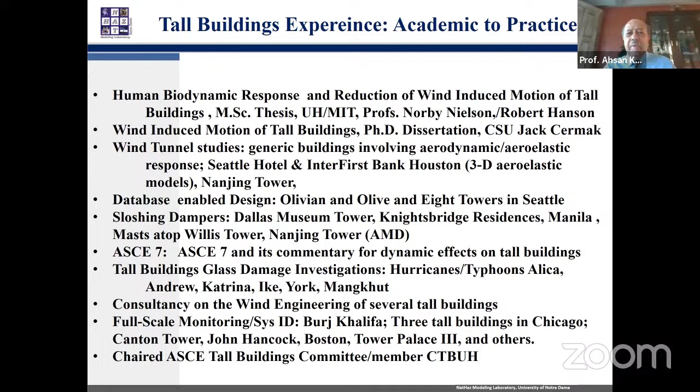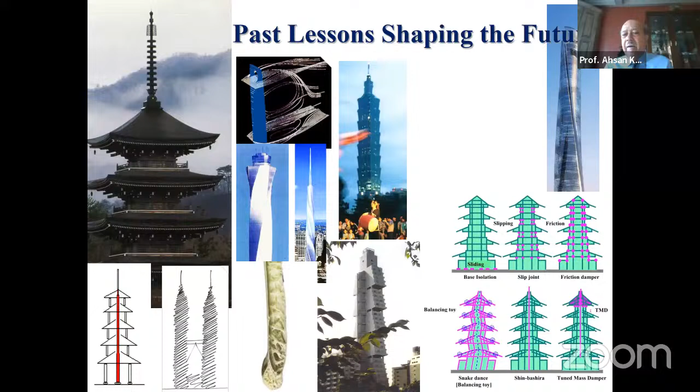Cesar Pelli picked up the same concept and shape for Petronas Towers. Then Taipei 101 used a very similar approach. The University of Tokyo used to have a building shaped like a pagoda, which was my favorite, with a liquid damper on top, but they dismantled it for a different high-rise. If you look carefully at biomimicry, some birds' wings also have reinforcements, which provide a lesson similar to what we see in pagoda designs.

But look at the Burj Khalifa, the world's tallest building—it does not have any damper. Why? Because they nip the evil in the bud, as the old British saying goes. They shaped the building so you didn't have to worry about it. As you go from top to bottom, the shedding behind, the whirlpools or vortices, have different patterns, which means they cannot be synchronized. If you have a square building all the way to the top, they're very synchronized, and you're in trouble—like that building in New York City with a humongous two-floor damper to keep it in place. Otherwise it would just be flying in the air.

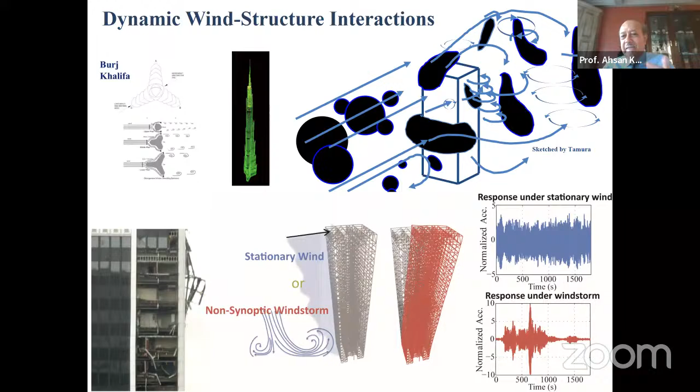This brings back that Delhi conference. I think my paper was the second paper in the opening plenary session, and I started giving the lesson that non-stationarity is important, and everybody sort of smiled at it—oh, so Kareem is doing his stuff. Now if you go to any wind conference, 70% of the papers deal with non-stationarity. So this is an area we need to look at carefully.

Human biodynamic response to motion—if you're sitting on the top floors of a building, things will vibrate. But this all started even with early riders of chariots, who used to feel vibration problems. Those guys were tough though; they just sort of ignored it.

In the early 70s, the Wall Street Journal had an article that changed my interest and brought me into the world of tall buildings. They called it 'dizzy heights,' because a building in New York was moving too much—it was poorly designed, really dancing, and people were getting sick. That got a lot of notoriety, and eventually, about 10 years later, they put dampers in it. But basically that was a structural issue.

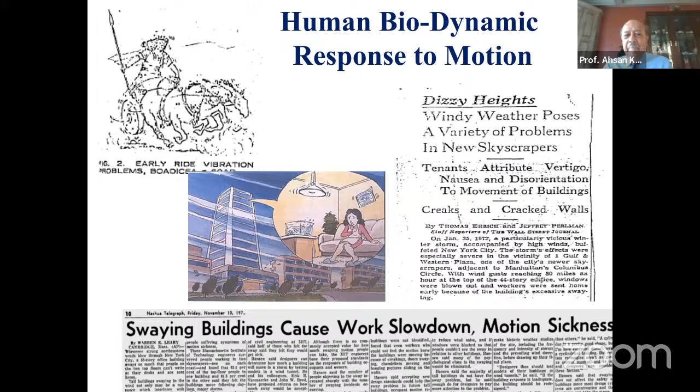So I did my master's thesis—instead of working on confinement of concrete and columns, I shifted. I said, this biodynamic motion, the response to motion by human beings, is another very interesting area. So I did my master's thesis looking at various psychological, physiological, and physical features, because every human being is different—some people may like the motion of a building, others may not.

So I started looking at this coming from a dynamics background—those of you with a systems background will talk about a transfer function. If you're from a structural dynamics background, you'll call it a mechanical admittance function or something like that—what transfers load into response.

So I thought, why can't we have a similar transfer function for a stimulus, which could be acceleration, and how we perceive, which would be reaction. I came up with this: stimulus is proportional to amplitude times frequency raised to the power p, where normally p is 2, which gives us acceleration. This is why people always look for acceleration for motion perception.

So ASCE then had this wind-induced motion booklet. Those of you who are interested, there's a lot of background on how we perceive motion.

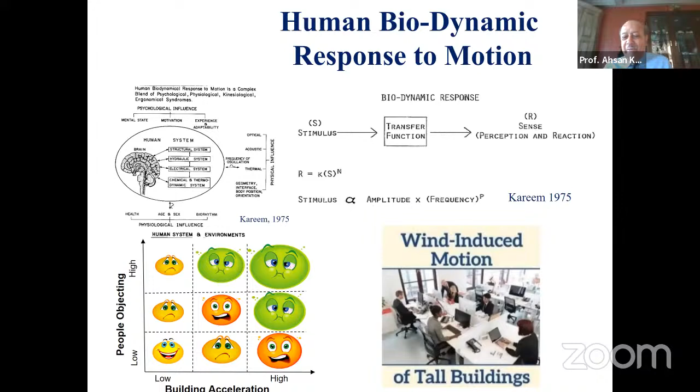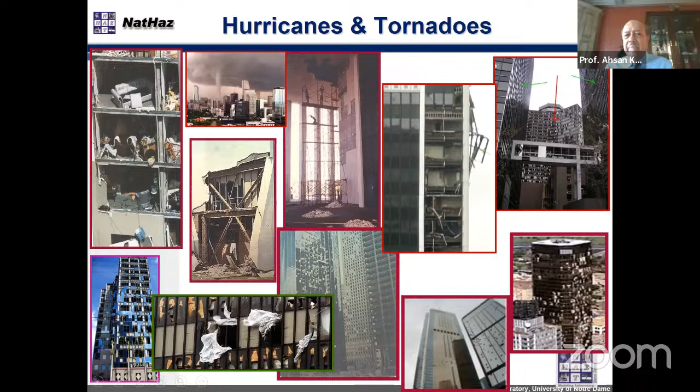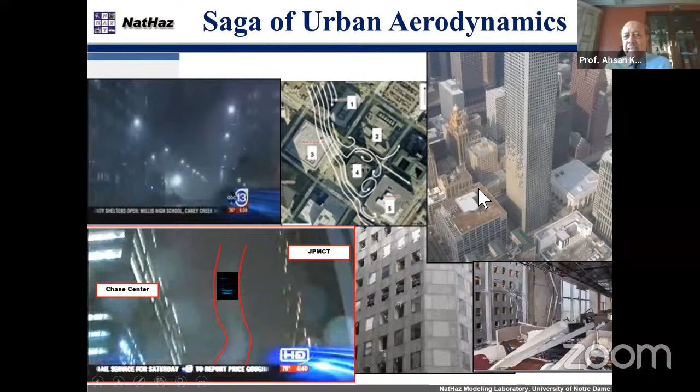So I call it the saga of urban aerodynamics, because we ignore this. This was never considered in any design practice, but we can trace it back to what really happened. Now China is experiencing those things.

This is Typhoon Mangkhut, and as you can see, the window panes are flying everywhere. The building on the right is a super tall building in Shenzhen, and I think that is moving up and down as well.

So I think this is a lesson for India to keep in mind, because I'm sure you have a lot of debris like any other place, and debris gets lifted up. It's not only the wind pressure which causes the damage, it's the impact of the debris which also becomes a problem.

So the cost of wind disasters is escalating - 665 billion in 2022. That's a lot of money to waste. We could feed a lot of people for that. So hazards cannot be eliminated, but we can engineer things to enhance their performance in these particular storms.

I'm pretty sure you guys have cyclones. The Pacific Rim people have typhoons, and we have hurricanes. This year they're considering it might be very strong. But again, climate has some impact on these things, but those are cycles which keep coming and going back.

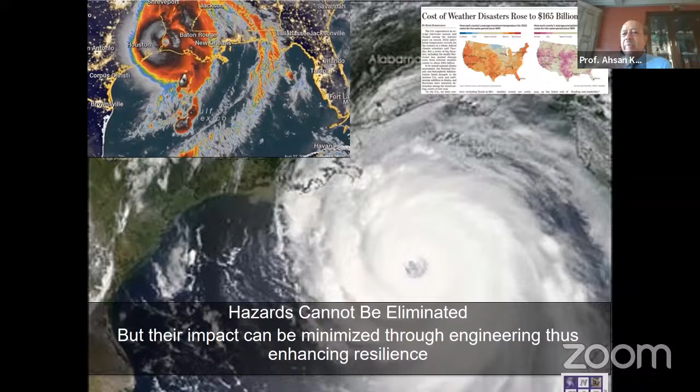What do we do? Model the wind, and we come back to tailor your structure. We have four tools available to us: codes and practice, wind tunnel testing, full-scale monitoring, and the fastest emerging one, computational methods, which is becoming very popular. I'm sure a lot of people listening today are quite involved, because there are many papers I see from India talking about computational methods.

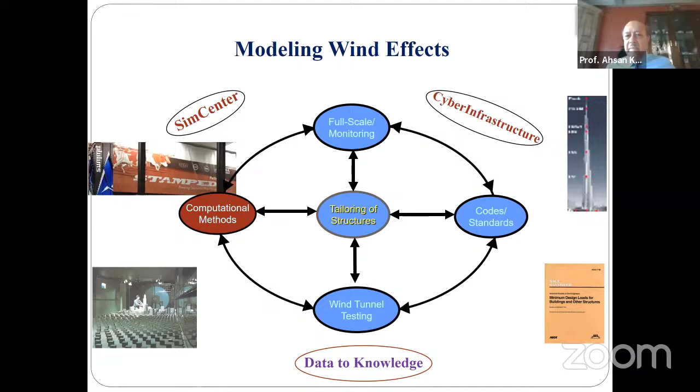Just to give you a history of tall buildings: in the early 60s, they were thinking of making the 2 World Trade Center towers in New York City, which unfortunately are not there anymore. These are some of the people involved with that, and I'll focus on 3 people you probably might have heard of. Professor Davenport was mentioned when he was just starting his career.

This is my advisor, Jack Cermak, in his wind tunnel, because he was the father of developing these boundary layers in the wind tunnel for scaling those things. And there they are. The third person, a structural designer, was Les Robertson, who's sitting here. This is the designer, and these two guys are helping him because he needed help — we had never built a structure like that.

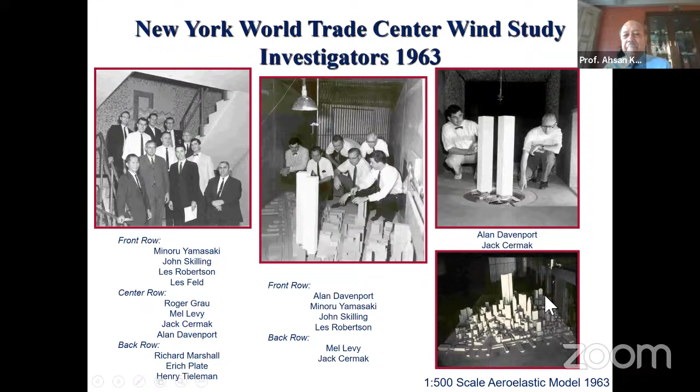Some of the architects included Yamasaki, and this is the New York City model from then. If I had a picture of today, well, these buildings are not there, but everything is about this height now - the new development. That raises a few questions addressed in the code.

Originally, when they started, this wind tunnel was in London, outside London - I think it's the National Physical Lab. That wind tunnel was an aeronautical wind tunnel where you cannot develop a boundary layer, so they used to have a uniform velocity profile.

So they tested these World Trade Center towers, and they were getting 40 feet of deflection at the top. Something was wrong there. They added some turbulence that lowered it down a little bit. They made this profile, which we use in the building codes, and put turbulence on it. Everything went down further. But now we have another challenge.

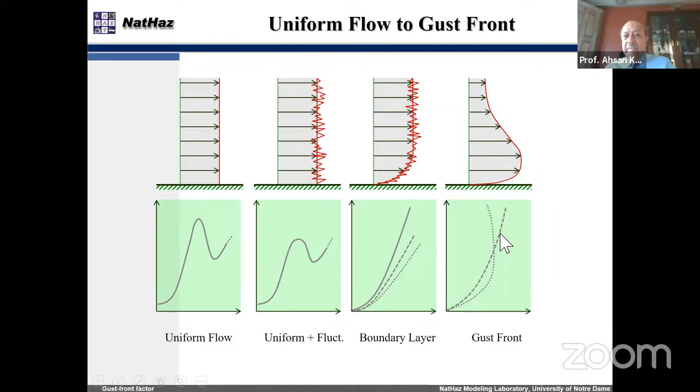We have this boundary layer in the case of a thunderstorm, which is heavy at the bottom, whereas the other one is not. So the response changes accordingly. This is a proprietary picture - please do not use it anywhere.

This is from the World Trade Center towers. This is what they did in England, and the response was way up. So the scale sort of changed.

Just to give you an idea, we come to the middle picture - that's a moderately rough boundary layer - and the right one is a rough boundary layer, and the response of the building became a more reasonable value.

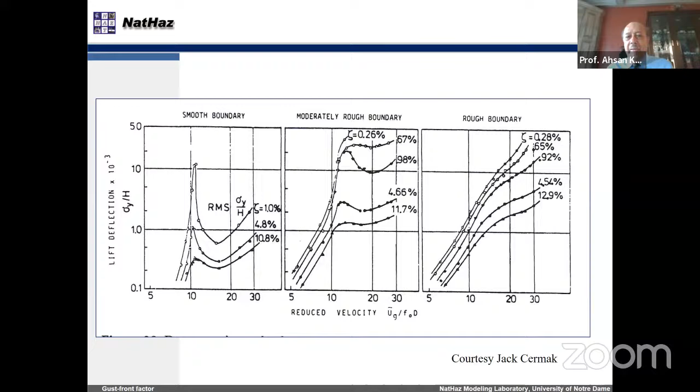So now we are flooded with wind tunnels - all sorts of wind tunnels. I was part of a visit to SERC in Chennai, where the wind tunnel was just starting to develop, and we participated in developing the profiles and the high frequency force balance. Lakshman and Selvi were the two persons there; we interacted with them, both at different ends of their careers at that time.

And China has some huge wind tunnels. The US has built some very sophisticated wind tunnels recently. Another fashionable thing now is these multiple fan wind tunnels. I assume there's one in India too, probably somewhere like Roorkee, I'm not exactly sure, but India has one multiple fan wind tunnel.

Now the question is also what we do with all these wind tunnels when computational methods and supercomputers are really crawling in, trying to compete with the wind tunnels. So just to give you an idea, what do we actually do in the wind tunnel?

Because a designer doesn't care what you do in the wind tunnel - he or she would like to have the loads acting on the building. A structural dynamicist would like to have more generalized loads on a building, mostly in the first mode. So how do we measure them?

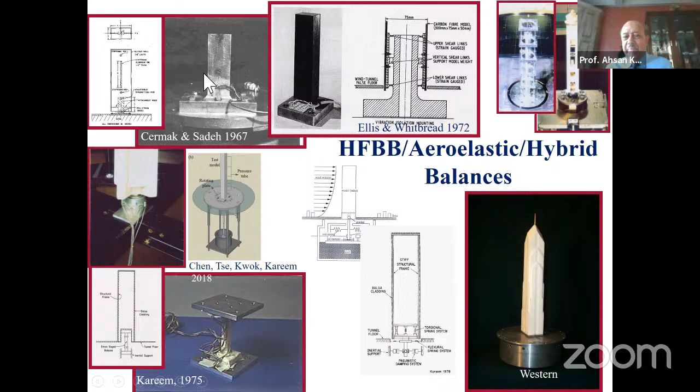Because the pressure sensors were very expensive, we used techniques to use a minimum number of pressure transducers but still measure area load. What we were doing was measuring at various points, but averaging them in a little manifold. So this one output, but the input was like 20 sensors. This is primarily for loads, integral loads.

If you are interested in point pressure, you cannot use this. This was called local averaging, and I played with these to measure torsional loads, because if your weighting function is more on the end with a smaller lever arm, you only put one pressure tap. So pneumatically, you are developing this torque on the structure.

We also looked at distributed taps with triangular configurations, and then also these PVDF films came, which are sensitive to pressure. But unfortunately, you have to do a lot of work with them because they're also sensitive to temperature, and you don't know which reading belongs to what. So there was a lot of development in this area.

But today, every wind tunnel laboratory, including some of yours, for example at Roorkee and other places, has multiple pressure sensors, because the sensor is even less than $50 a piece, I think. Mostly people have 600-700 pressure taps, so you can scan them simultaneously and don't have to do those things.

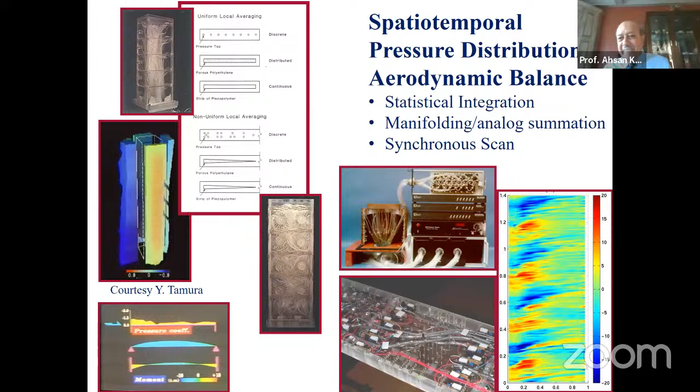I had an equation, I removed that, but I left one because this is part of my PhD dissertation. When I was doing response of the building using these loads developed on the building, I realized that after certain wind speeds, I was not matching my measured response with the corresponding aeroelastic model of a building. I realized, oh my God, when the building moves too much, it creates its own loads. So how to account for those? At that time, I had some work done on bridges, and I borrowed the concept from flutter and brought in a coefficient J star in 1982 to compensate for the aerodynamic loads, which are also caused by negative aerodynamic damping.

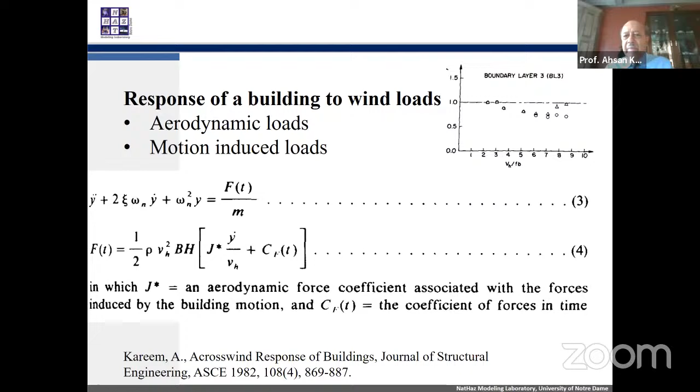Now you can go to the journals - there are tons and tons of papers, people working on trying to find this J star, which I already have. While having accounted for that, my results match fine.

As you have seen, the World Trade Center towers have surrounding buildings. This means if we didn't have these buildings, from every angle, the load on these towers is sort of symmetric, so the building doesn't have any torsional response. If you look at this cartoon, here's a tall building, the wind is coming here and hits the front face - this is the direction we call along-wind response, and 90 degrees to that is what we call crosswind response.

And obviously, we got torsional response. A crosswind response normally far exceeds the along-wind response. But unfortunately, most building codes only address the along-wind response, because we can compute that using this sequence of modules. It's originally based on aircraft buffeting theory, but picked up by Professor Davenport for us, and he called it a loading chain.

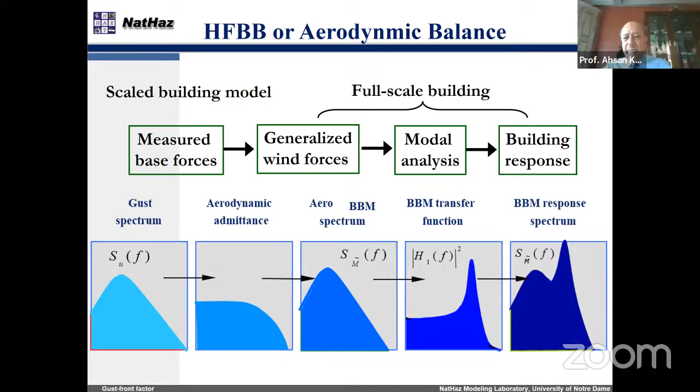But if you put surrounding buildings, a symmetric section starts seeing some torsional loads, because of the unsymmetry in the flow conditions. So this is one source of torsion. You might not always assume that you have a square building and everything is very kosher with no problems, but the surroundings can create issues.

Here is a Park Hyatt in Tokyo. This building also has a torsional issue because the building is unsymmetric, though the surroundings are not that bad.

Then comes structural dynamics 101. You got a building in which we have various centers. Shear center, you remember from strength of materials. Then you got geometric center, and you got aerodynamic center. So when these centers do not coincide, you will have torsion.

So I'm just alerting you guys. Nature is very good. Daffodils have a tendency, when the wind comes, they turn around and offer the wind the minimum drag. The wind goes away and they switch back. Unfortunately, we cannot do this to the buildings, but later you might see some similar stuff.

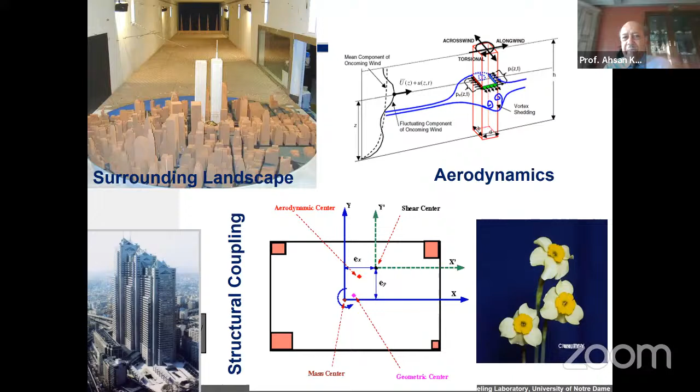So in order to expedite this design process, we have developed computational platforms, so everybody doesn't have to be an expert in everything. You can go to the NatHaz website. On the left-hand side, you'll see a lot of tools which can help you to do design of buildings, simulations, damping databases, virtual wind tunnel, CFD, damage assessment, and full-scale measurements.

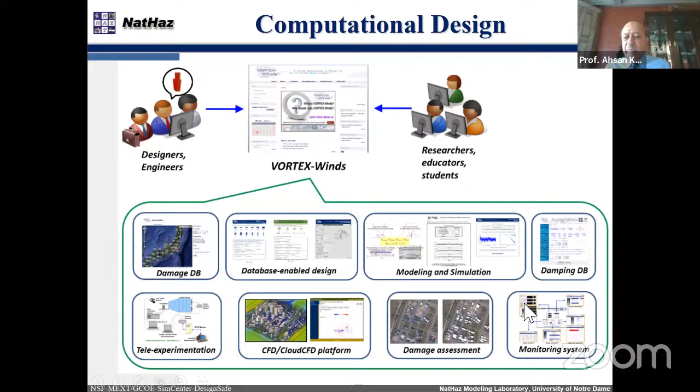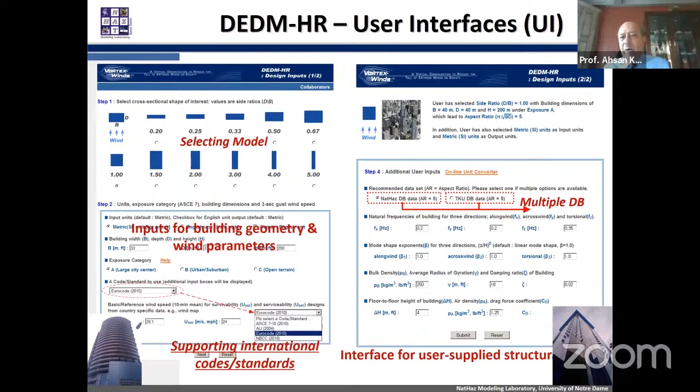Here are some examples that you log into. All you have to do is plug and play, and you will get your response. It even includes the building codes from different countries, because every code has a different requirement. So you want to make sure that you don't design for the United States when you design for India or whichever other country you are involved with.

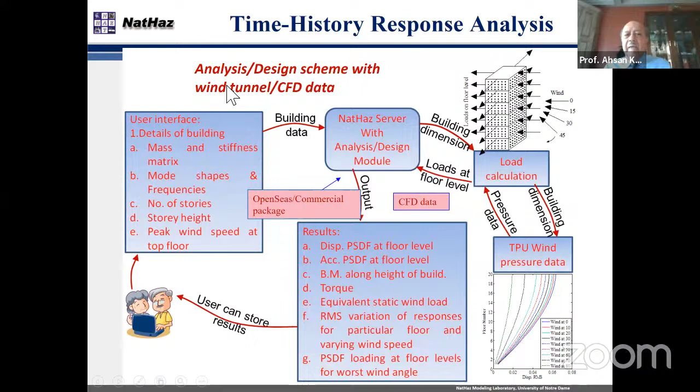So the game is played that we do this time history analysis. Here comes back that picture of the building with 600 pressure taps. We got to simulate that data, and that's all done on a web-enabled MATLAB code which works behind the scene. The data doesn't have to come from wind tunnel, it can also come from CFD, computational fluid dynamics.

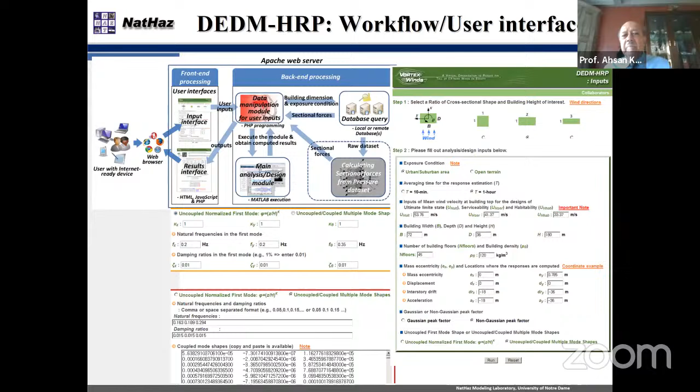There are papers which give you more detail, and I think I have to skip some. Those who are interested in occupancy comfort in tall buildings, we have not only provided how to compute response, but we've also provided some statistical analysis on how many people are going to be affected by a particular storm. So there are all sorts of tools available on the web.

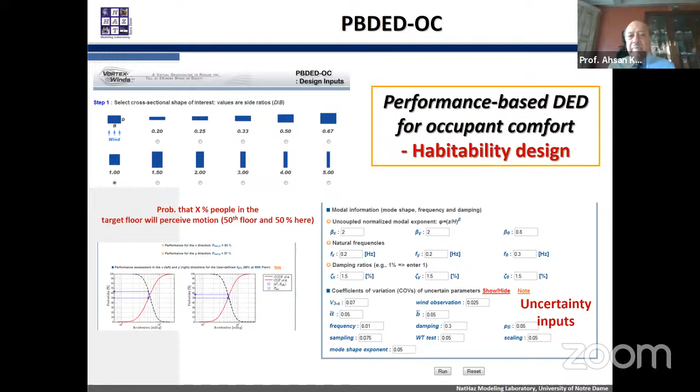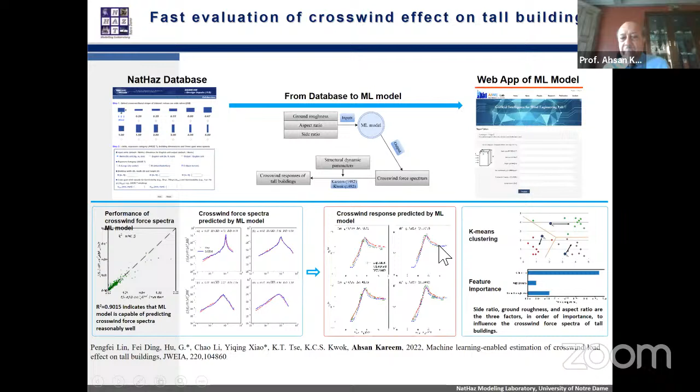We have now extended this to machine learning, in which, with collaboration with our colleagues in China, the left-hand side is our database, but it may not have everything. So what it does is it learns from what we have here to give us shapes which are a little bit closer to ones we don't have in the database. Here are some of the predictions, which are pretty good using machine learning and artificial intelligence.

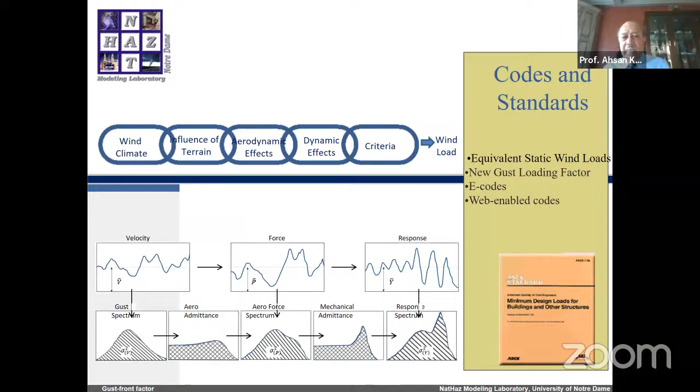Building codes, as I've already talked about, is a very good solid way of doing things. And I've already gone through this wind loading chain. I think I'm going to skip this little sketch.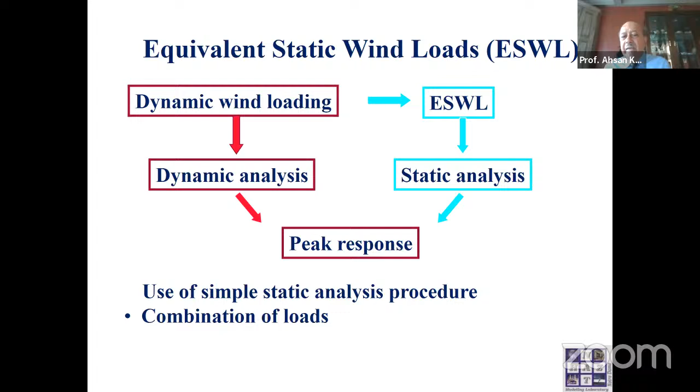Building codes totally rely on equivalent static wind loads, and the dynamic loads are converted into a peak response. Either you can do full dynamic analysis, which everybody cannot afford, or you can develop an equivalent static wind load, similar to earthquake engineering, where the base shear equals a long equation. Those who have done wind analysis know the equivalent static wind load works the same way. The next step is, if you have the equivalent static load, you do the static analysis, not the dynamic analysis, and both will give you the peak response.

So we will pause for a second. I need to get to my second half, which I'll try to go a little faster because things have been a little slow. Let me get my, yes, okay, I have to stop sharing.

The two files are so big that I had to separate them, because in this one you see a lot of animations just to give you a glimpse of what computational tools can do.

Now for the second part, quickly I'm going to go through computational wind engineering, because that's the future - the fusion of CFD, stochastics, which many of you do, and machine learning and beyond. Everything is going digital, I don't have to make a case.

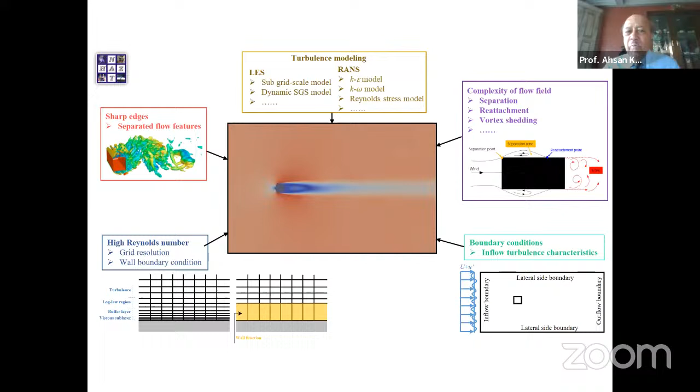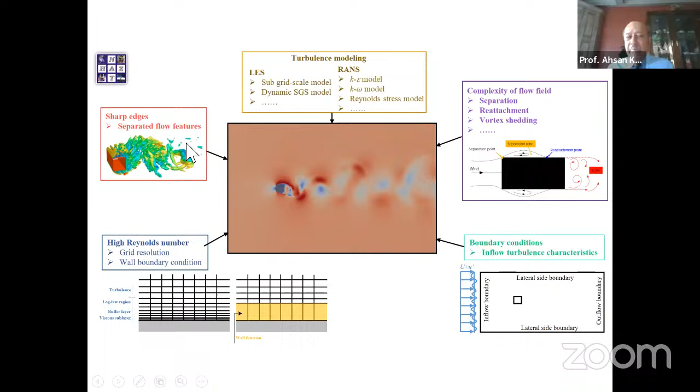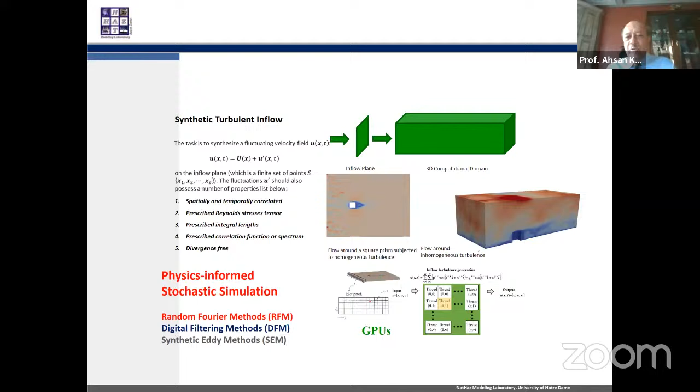Here is some example of inflow conditions. We can also use GPUs instead of CPUs, because that expedites the simulation process. If the building is moving, we can also accommodate that, and in this way we get a coupled response between the fluid and the structure.

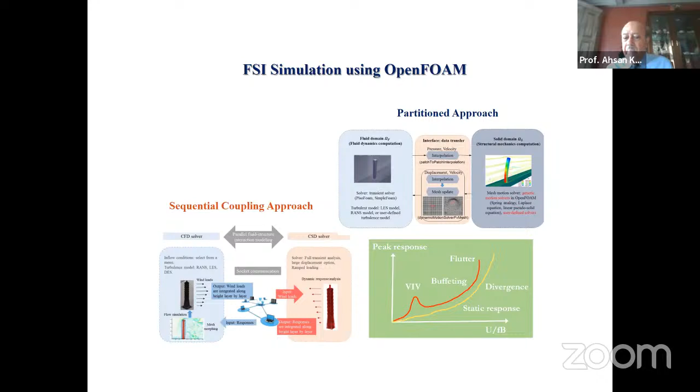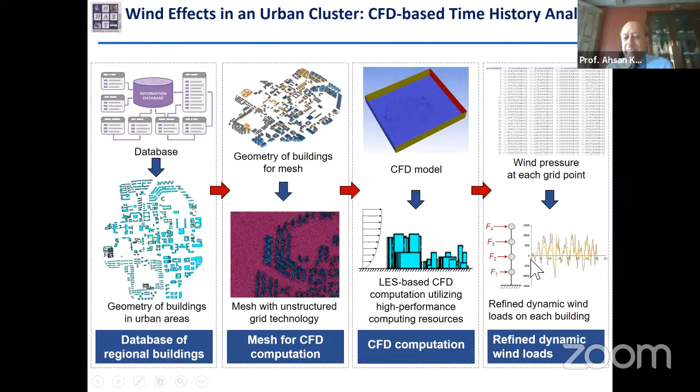Here is an example where we took part of San Francisco and got the database of all the buildings. From there we created a mesh of the buildings, developed a CFD model, and once we got the loads, we coupled that with a structural dynamics model of the buildings to find their response. Here is some more computational detail, which isn't that important at this time.

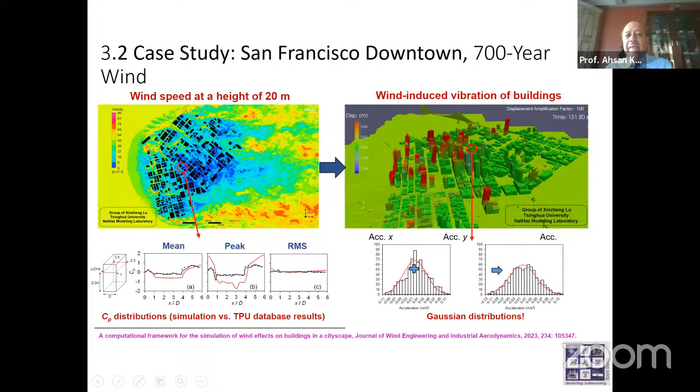We have compared these results to wind tunnel measurements. The mean does very good, RMS does very good, we have some issues with the peak response which needs further refinement. So we can give designers a chart showing that the buildings which are red, they need to worry about. By the way, San Francisco doesn't have that many buildings in red, but we used a higher wind speed just to see what things look like, because San Francisco doesn't have too many tall buildings - it will be different in New York City.

Also, we can give pedestrian comfort assessments. We tell them, hey, these are the red spots, you've got to worry about it - showing the different percentage of people who will be objecting to that. So this is a very powerful tool for the design office to be using.

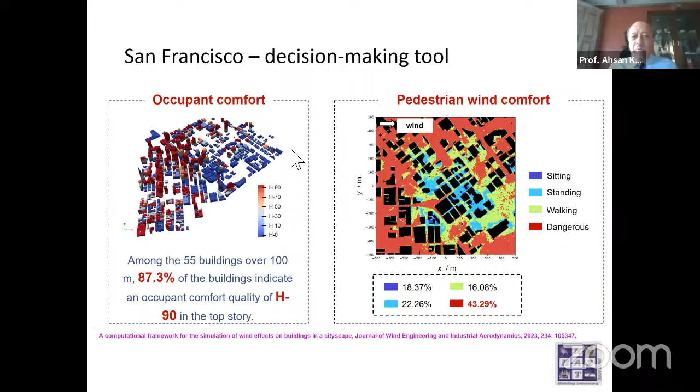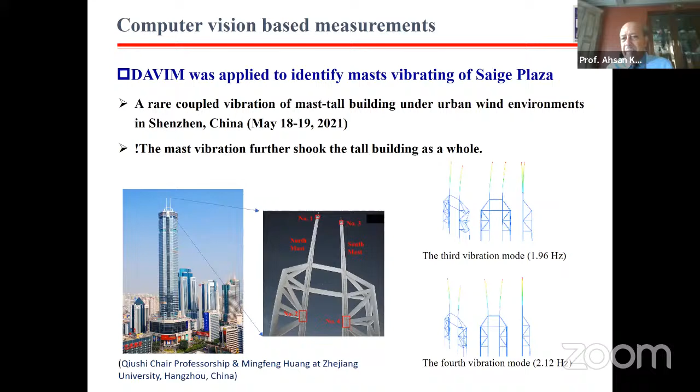We have another issue we found out in China. One of the buildings, on a not very windy day, started vibrating in Shenzhen two years ago, and you can see the spires on top were also moving. So the first thing we wanted to know was what the wind speed was there, but we didn't have much measurement - only the measurements of the mast.

Now, we had access to the accelerometer data, but we were not supposed to publish that, so we used another way. We had a video taken of the building from the street, which nobody has a right to restrict - anybody can take a video. So using vision-based analysis, we produced spectra of the response and the time history of response, which is a very clever way to handle these things.

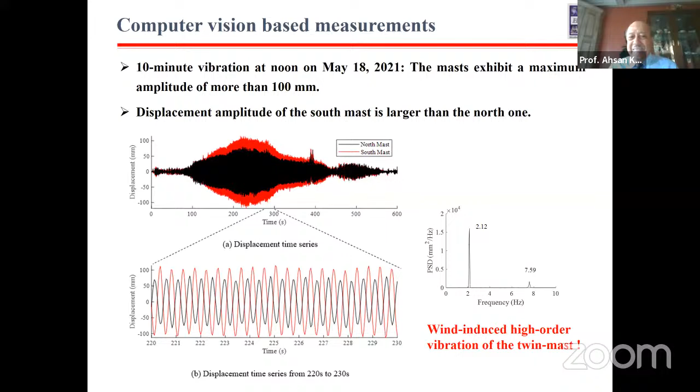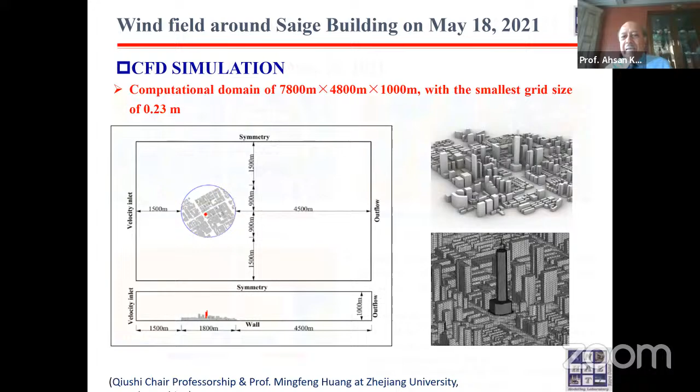Then we went into our CFD simulation of a storm, large scale, progressively bringing it down to a shorter area, and eventually got to the boundary layer near the building, then started modeling the building itself. These are the flow patterns around the building in various parts of the structure. As a result, we found out that the mean wind speed there was sufficient to cause the masts of the building to go into vibration due to vortex shedding.

And then, like they say, it's tail wagging the dog - that's a British saying. It's the same thing here: the tail on top of the building was actually wagging the building. So the building was not vibrating because of wind directly, but the wind vibrated the towers, the spires, and the spires shook up the building. This is another problem - one of the reasons we have damping, we need to put in sloshing dampers and tuned mass dampers, because if we don't, when the structure stops vibrating due to an earthquake, the tuned mass damper mass will still be moving and it will become a shaker.

So that's why we put damping in the secondary system, so that after the event is over, that mass needs to calm down also. Otherwise, it becomes the same as this particular building.

These are some other things, working with a colleague, Professor Hu, in HIT Shenzhen, where he is using a lot of physics-informed, graph-assisted autoencoder. These are city maps, where we have some measurements at 5-6 places. Like in Bombay or Delhi, you have, say, 10 sensors, and you want to find out what is happening around the city. Now there are tools available, and this was one example.

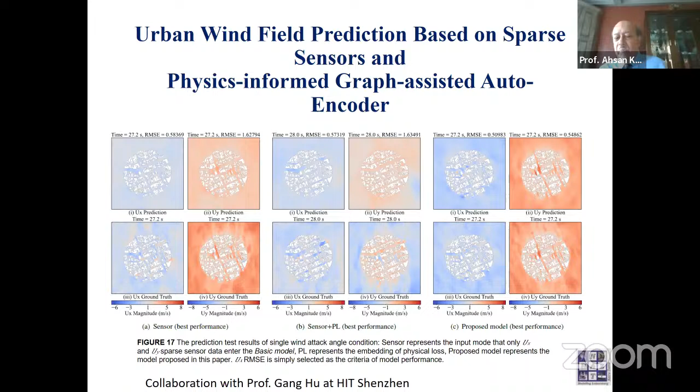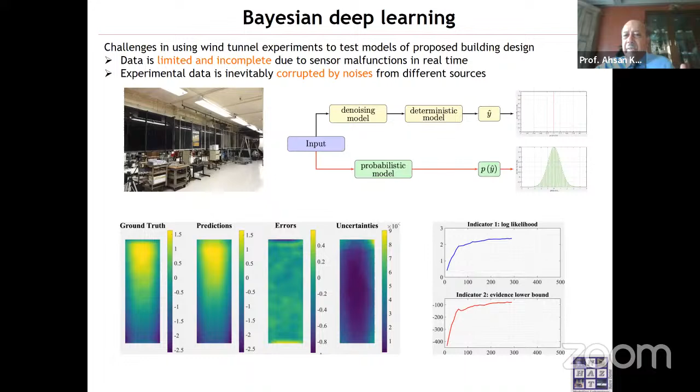So a lot of new things are coming. We can predict - you can measure, this is the ground truth, this is the prediction of pressure fluctuation in the building. Say you can only run for 30 seconds, and then you can create 1 hour using machine learning. This is one example of that.

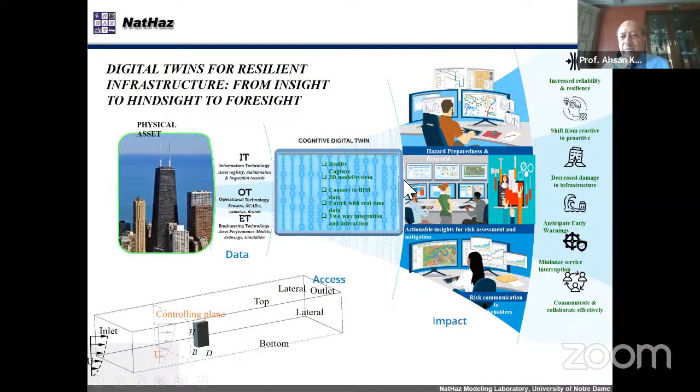We are developing a virtual twin, or digital twin, of a wind tunnel at University of Florida. So you can do everything on your computer, on your virtual wind tunnel, before you go do your experiment. That way you can design your experiment better and do some validations. Many of you are very familiar with digital twins, or have made them also, so I won't go into the details.

I forgot, so far I said I have a global living laboratory, or used to have it, where we have 3 buildings in Chicago, Boston, Dubai, and in Seoul, Korea, where we had done some very sophisticated work, especially monitoring this very tall, 800-meter tall building.

You can't run a cable from there to down there - that will make you bankrupt. Not only that, even if you have the money, nobody is going to let you pass their cable through their bedroom closet when they've paid like $20 million for a condo.

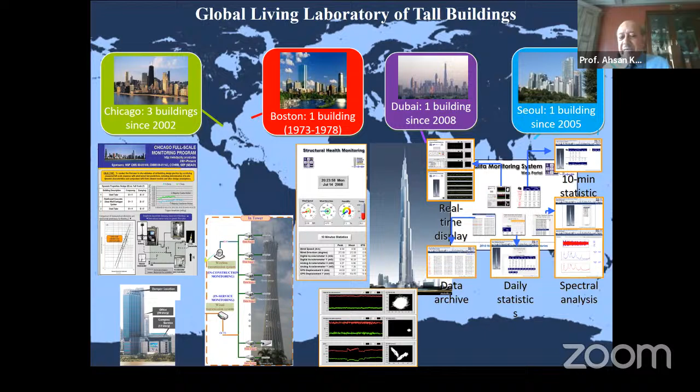So we had to come up with this very smart way, which I call real-time system identification, and we use a SmartSync concept. Later on, we found that people call it the Internet of Things. We were before theirs, but this is actually an Internet of Things, where each sensor is dumped into the internet right at its location.

So we don't use cables, virtual cables instead. Then the computer at the base of the building does all the work, and then we can go from internet to wherever we want to go. We also did some calculations at the site, at the sensor, which is now called edge computing, because you distribute it - you don't do everything at the central processor.

So this is for the first time in a real building where you can sit down and see how damping is changing from fraction of a second, how frequency is changing, how the mode shapes are - which has been done. Anybody interested, you can remember SmartSync and Google it, and you'll get the paper.

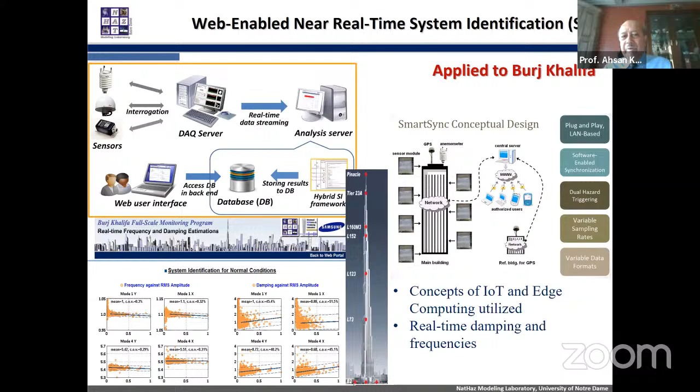I don't have time for this, my dynamic shaker, but this is something which I'm very proud of. It's a very simple thing. We have sophisticated methods for system identification, and I'm pretty sure some people in the audience are experts in some of those methods.

We have come up with something I call a virtual dynamic shaker, which is based on Dynamics 101. Half an hour lecture on dynamics, and you are good to go. And you compete 100% with the most sophisticated methods.

What I was trying to reproduce was, as Prem probably knows, the work done at Caltech and BRE - they had these huge shakers in Sheffield. They would take it to the top of the building and shake it to get the damping, the frequency, and the mode shapes, and we've done that virtually.

Here is my building - it is being excited by wind. Here is my response. I take this response and feed it into a virtual damper - a small mass - and I get the response.

I have a radio button where I can change the frequency on MATLAB. The response would be like this - when this frequency is the same as the building frequency, all of a sudden, zoop, and that is my system identification for the frequency of the building.

A similar trick can be played with the damping. I have compared here some full-scale data, some simulated data, and compared with some of the most sophisticated techniques available, like ERA, NExT, and see how close we are to them, because we don't know if they are better or we are better. But we are very, very within a few percentage points.

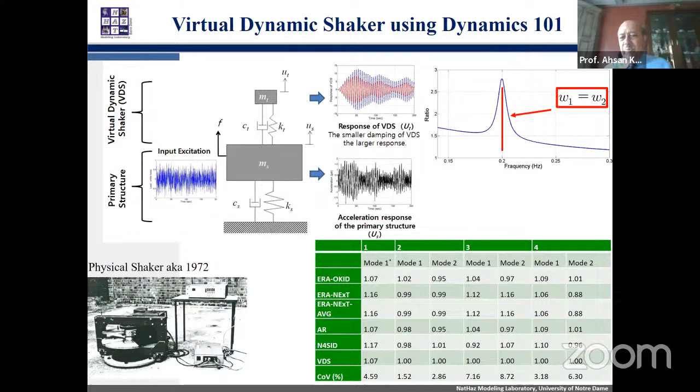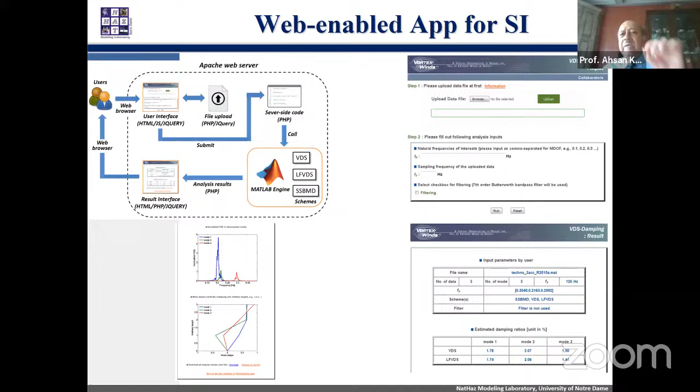We have also developed a web-enabled app for this, so that all you need to do is take your response MATLAB time history, just paste it, and you get all your results.

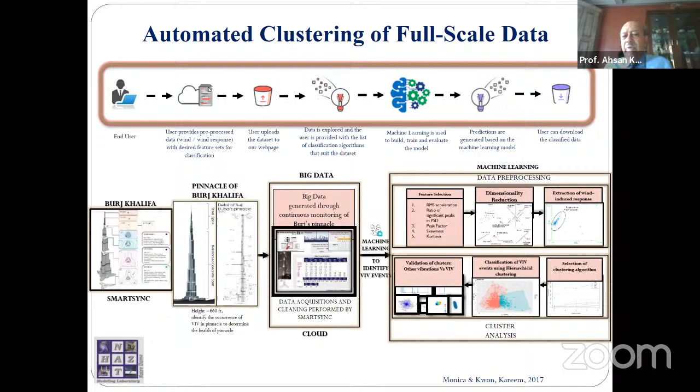We have done some other clustering analysis. I don't have time to get into detail because we have so much data coming from Burj Khalifa. If you're only interested in vibration of the pinnacle, you would need hundreds of people sitting looking at the data to find it. But machine learning sort of isolates it through clustering technique, so we can have only the vortex-induced vibration data for that building.

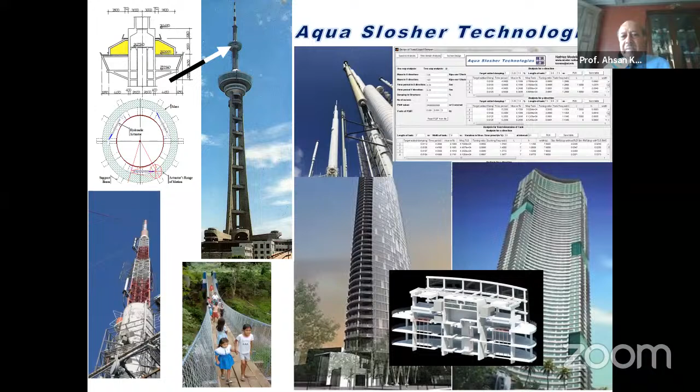Damping models we have done, sloshing dampers we have done for buildings and structures. We have done some hybrid testing of sloshing dampers, because a sloshing damper is a nonlinear system, so we have difficulty predicting it. So what you do is, like in earthquakes people do, whatever you cannot model, like a joint, you put it in real life, and the rest is on computer. So this is what we want to do, and this is what we partially want to do.

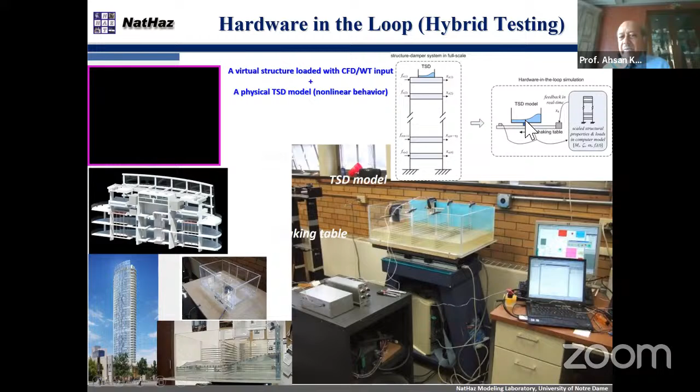Sometimes swimming pools and sloshing dampers can be bad. Just the same thing I told you, we have to dampen the motion. Unfortunately, you cannot do that for a swimming pool, but for dampers we can. This happens and can happen.

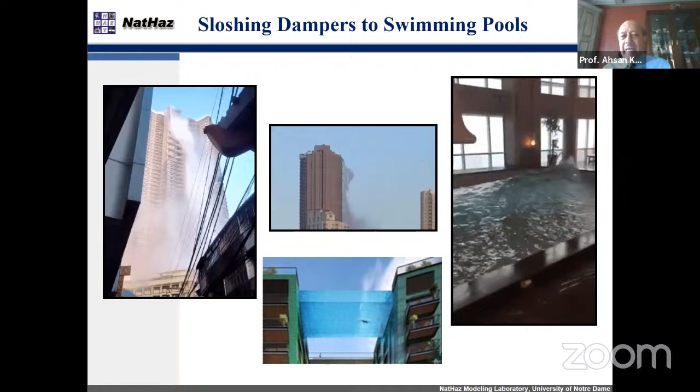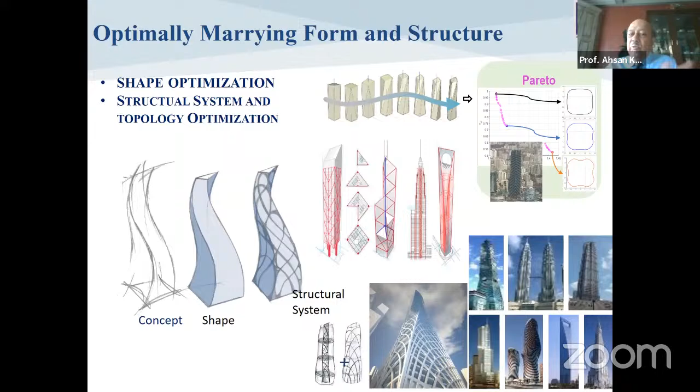We have been doing some work in shape optimization, and I won't go into details. We can optimally marry the form and the structure. That is structural engineering, where you can shape optimize, because shape, as you saw in the case of Burj, really helps.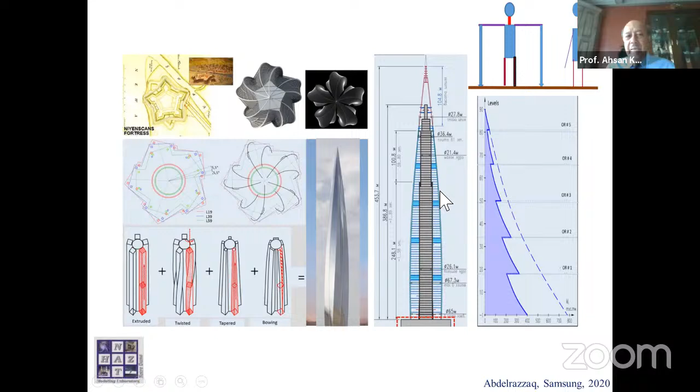Here is an example of one of the buildings, the Lakhta Tower in Russia, in St. Petersburg, where the building is twisting and bending, and it makes a very good case for reducing the loads on the building. This is designed by Samsung Corporation. We are also looking into living facades.

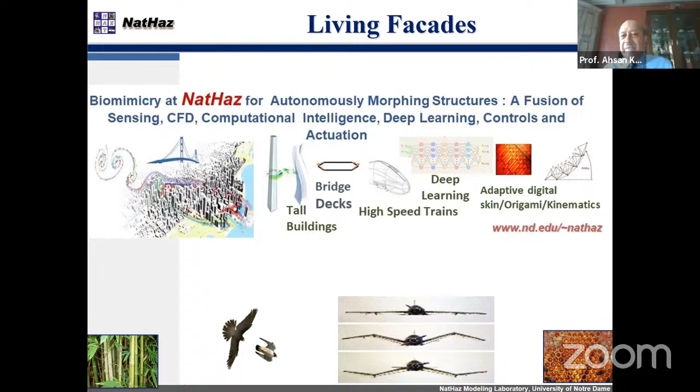Why can't the building change shape in real time? So we have developed some scheme which copies the birds. I don't have time for the details, but living facades will be coming. Most of the people in the audience will be designing those in the next 5 or 10 years.

You can harvest energy from the buildings, which is also becoming popular. This is my last slide.

In '73, my famous professor at MIT, Professor Hansen, asked me about a project, and my conclusion of the project was, in bold letters: people who occupy tall buildings need to be informed and conditioned to the performance of buildings during windstorms. He thought I was crazy. He said this is a bad idea, we should design our buildings so that we don't have to do that.

I don't think we have succeeded in designing buildings that way, but we have been better at educating people. Dr. Les Robertson, many years ago, was staying in a Hyatt Hotel in San Francisco, and in the drawer, he found this card. He picked it up, put it in the mailer, and mailed it to me because I had told him about this story.

So a few decades after that, Hyatt Regency is telling people the same thing: don't worry, the building is going to move. It will make some sounds, but you're okay.

So with that note, I'm sorry for going a few minutes over, and I'll stop here. Sorry, I had packed up too much stuff, but I got into a little more detail at the beginning because the majority of the audience might be structural engineers only, and I wanted to make sure they don't get thrown off with too much wind engineering jargon. So I wanted to explain that.

There are a few questions in the question and answer box, so I'll be taking them one by one. The first question is by Dr. Abhay Gupta. He is asking, please enlighten us on the natural time period of buildings to be considered for dynamic wind analysis. There is a basic difference between the philosophy for wind and for earthquake analysis.

That's the issue we had, because ASCE 7 has a chapter on earthquake engineering and a chapter on wind engineering. We have guidance for damping and frequency in earthquake, and a similar one in wind, and they are in contradiction with each other because the design philosophy is different in both cases. We want to make sure the building resists earthquakes, and if you make them too flexible, they'll be more sensitive to wind. So there's a little bit of dichotomy here. One has to determine which particular zone you're designing your building for, and develop a happy balance between the two options.